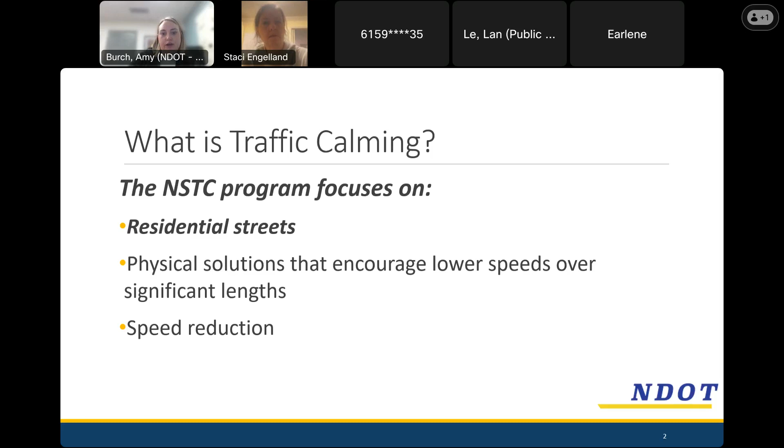We do this program on residential streets, and the whole idea is to install physical solutions that encourage slower vehicular speeds over the length of the street. We're really targeting speed reduction through this program. We often talk about the 3 E's of traffic calming, which is education, enforcement, and engineering.

Education is a lot of what we do, just educating the public on what traffic calming measures are, and the reason why we install those. We do that through these meetings, as well as other more public-facing information and educational programs. The enforcement is obviously what the police department does, but we know that the police department has a huge job, and they really can't be on all these residential streets every day and every hour.

So that's why this program focuses on engineering. How do we change the street or adapt the street to encourage those slow speeds and safer driver behaviors? That's what this program focuses on, is the engineering. And we do that because we know that there's a strong correlation between safety and speed.

This falls in line with the Vision Zero program that NDOT has, which all of Metro has adopted, where we're striving to achieve zero deaths on the road. Part of that is curtailing speeding, because speeding leads to more crashes, and more severe crashes.

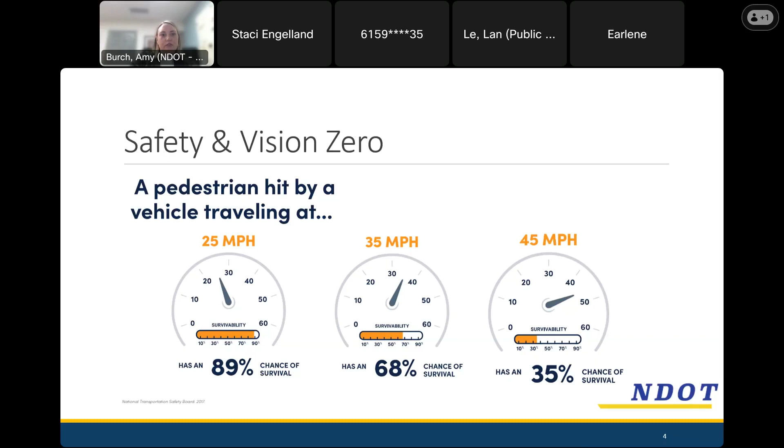As of last summer, there were 85 neighborhood streets selected. NDOT typically selects 50 per year, divided into two groupings of 25 and 25. But last summer, due to additional budget allocated by council, the neighborhood street traffic calming program was able to select an additional 60 on top of the 25 we'd typically select. That's why it was 85 in this most recent announcement.

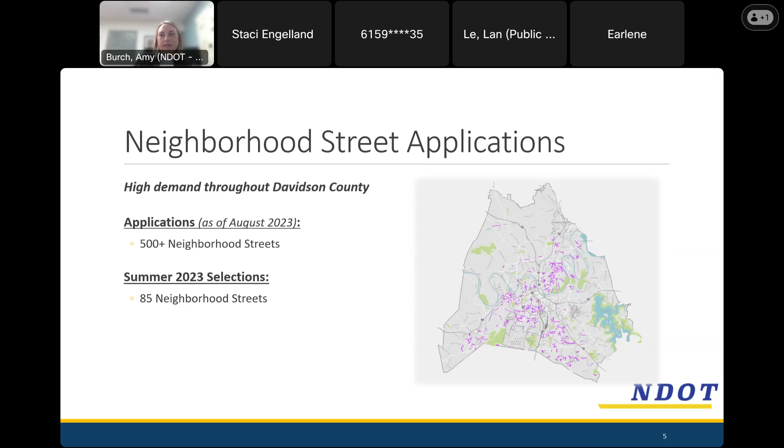Outside the traffic calming program, there's an excellent tool Metro has called Hub Nashville. If you're not familiar with it, essentially this is where you can report things and services that are needed, such as a street light that's out, a traffic signal not working, a sign that's been knocked down, a storm grate that's clogged and causing flooding in your yard, requests about trash—all those Metro services. This is a great place to report issues or ask for service.

You can do that by calling 311. Their hours are Monday through Friday, 8 to 5, I believe. There's also an online website, hub.nashville.gov, or an app you can download to your smartphone to make those requests. What's great about Hub is you get a service request number so you can follow up if needed. It's a great way to reach the correct department, because the system takes that information and gets it to the right department, the right person who can answer your question or solve your problem.

Back to traffic calming though. We have a prioritization process because we obviously have a lot of demand from streets and residents who've asked for traffic calming. So how do we select those? We score each street out of 100 points, divided into 5 main categories. We collect this data on every street that's requested traffic calming, measure them, and select those that score the highest.

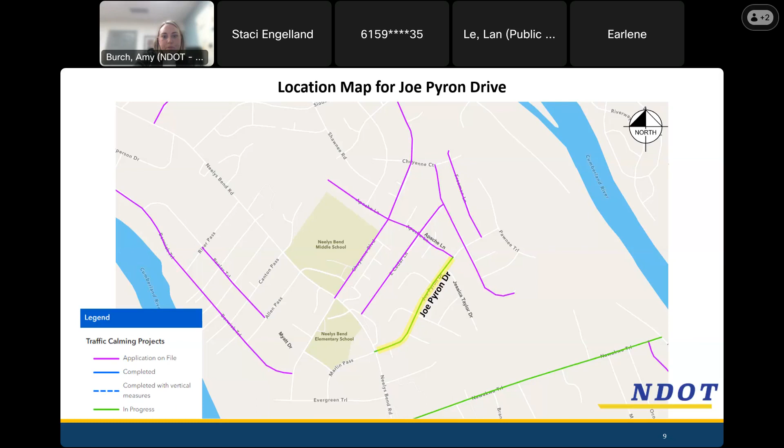So now we're going to talk about our toolbox. These are the measures that we use in the program to encourage slower speeds.

Our main tool that we use are called speed cushions. These are rubberized devices installed on the pavement in several different configurations, depending on the width of the street and other characteristics. They are vertical devices, you may think of them as speed humps, but the cushions are unique in that they have gaps between them to allow emergency response vehicles to not be as affected, while still being wide enough and effective for passenger vehicles to drive over and slow down as they approach and travel over them.

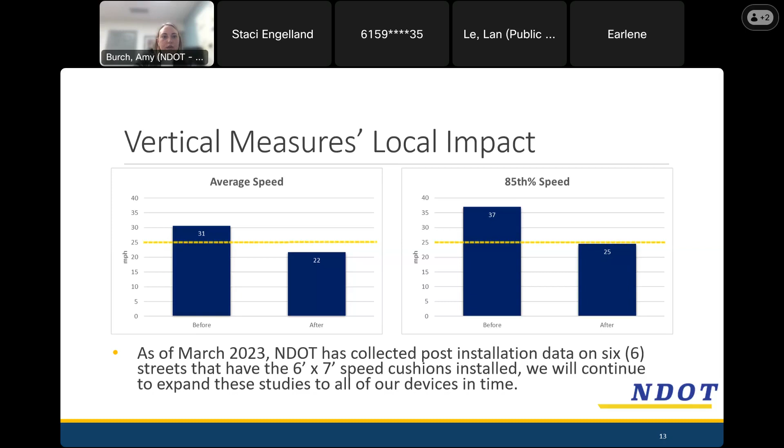I do want to go back, because I often get this question about speed cushions and speed tables: where do we place them? What about driveways?

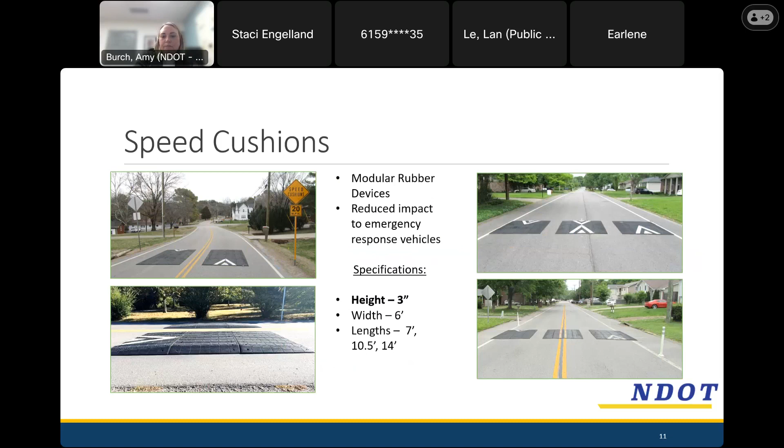When we place these, we don't put them right behind a driveway because that would be really cumbersome for someone turning in and out. So we try to place those a minimum of 15 feet away from driveways, so you're not having to back over them sideways or at an angle. We keep them away from driveways, streets, and intersections. We can't put them in the middle of an intersection either. Wanted to make that point.

Radar feedback signs are another tool in our toolbox. These are typically placed with a speed limit sign, and they measure with radar the speed of approaching vehicles, providing a reminder or alert to drivers when they're going above the posted speed limit. If a driver is going above the programmed speed limit, the sign will flash at them. We've seen good reduction and compliance using these tools.

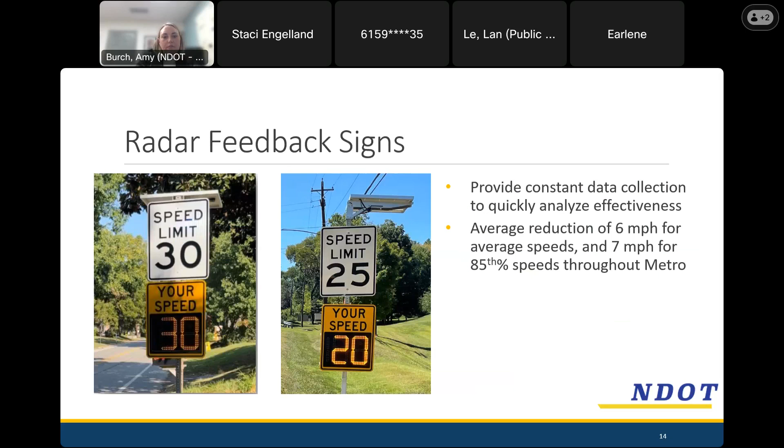The 85th percentile speed has been reduced as much as 7 miles per hour where these have been installed. We'll often use these in places where we can't install speed cushions due to grades, like hills and curves, where we can't put in vertical measures, or on streets where volume is too high for vertical measures. This is a tool we use to get slower speeds.

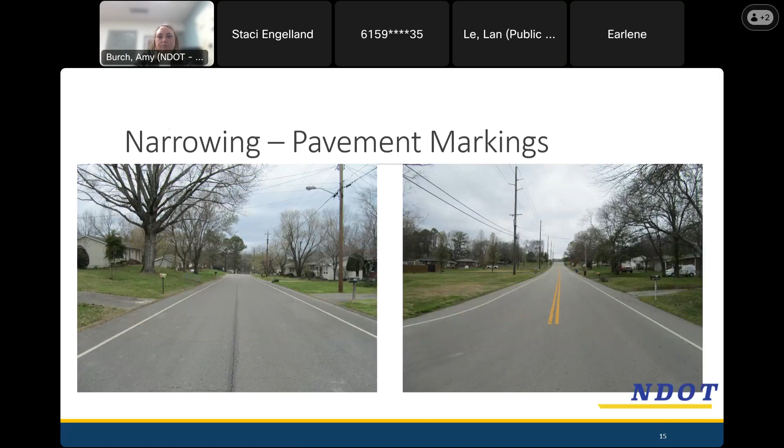We'll also incorporate narrowing and pavement markings. Sometimes we may have a street like the one on the right that had a center line but no white edge lines, so we can come in and put those white edge lines in to narrow the lanes and give that visual constraint for drivers.

We also use tools like bulb outs and chicanes. The picture on the left shows bulb outs, where we might stripe out the corners at an intersection when we have a wide street, to narrow the crossing distance for pedestrians. It may also designate where on-street parking goes, keeping parked cars from getting too close to a stop sign. Again, the striping narrows the lane widths, which gets drivers to slow down.

When we do these, we'll use paint for the bulb outs, along with white flexible delineator posts. The picture on the right shows chicanes, where striping and pavement markings have been used to add curvature to an otherwise straight street. Oftentimes that's done by alternating the parking from one side of the street to the other over the length of the street, so it adds an S shape to the street.

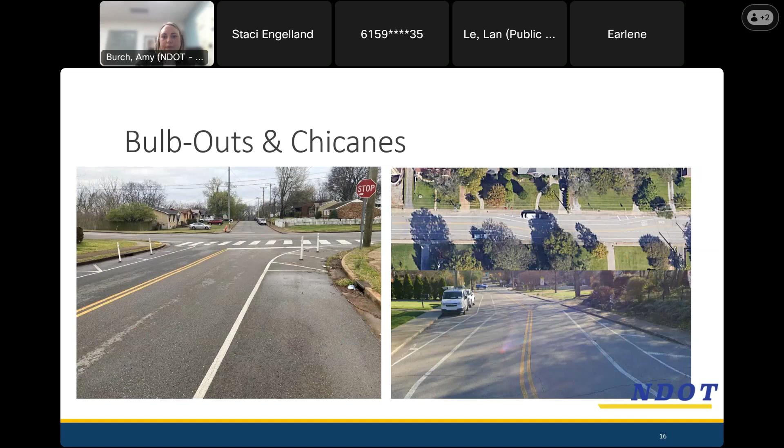That type of tool requires all the right conditions in order to work - a street with the right width to accommodate it, and not too many driveways and things like that. So that's some of the things we look at when coming up with a design.

Traffic circles are circular islands installed in the middle of usually a four-legged intersection, and they're treated similar to roundabouts where you drive around them in a counterclockwise fashion. This is a tool that's sometimes hard to find the right place for, because we need the intersection to be wide enough while still accommodating larger vehicles.

What it does is create horizontal deflection through the intersection. Drivers going through may not have to stop, but they need to slow down in order to navigate through it. Typically the side streets still have stop signs, and the main street will not have stop signs, but will need to slow down to drive around the circular island.

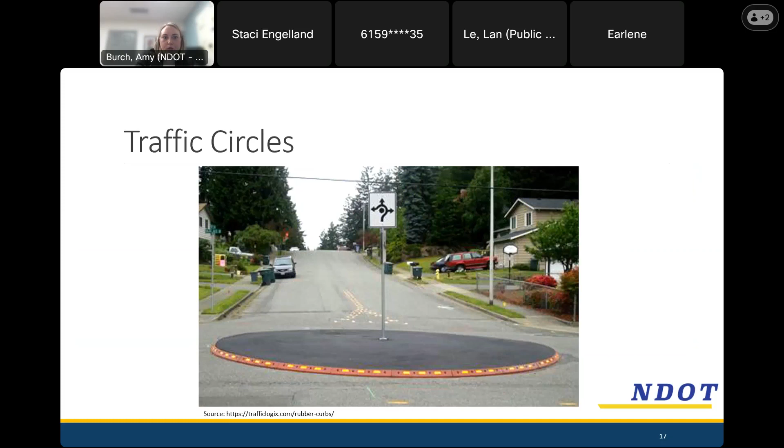So those are our measures that we typically use.

Now I'm showing our draft recommendation for Joe Pyron Drive. Based on the characteristics of the street, the width, the length, and how the street connects, we're recommending that speed cushions be installed. These are just symbols, a high level concept to give you an idea of the spacing. We're talking about 5 sets of speed cushions, and the picture in the inset is about what that configuration would look like. It would include warning signage at each cushion location, with 3 sets across and white markings on them as well.

So I might pause there and see if there are questions about this plan. Our next slides are some updates on how the program runs, our timeline and next steps. But I'll pause here first and see if anyone has questions - you can put them in the chat box or unmute and ask. What we're trying to do is get feedback about this plan to make sure we're on the right track, and that this is something the people who live on Joe Pyron are interested in incorporating.

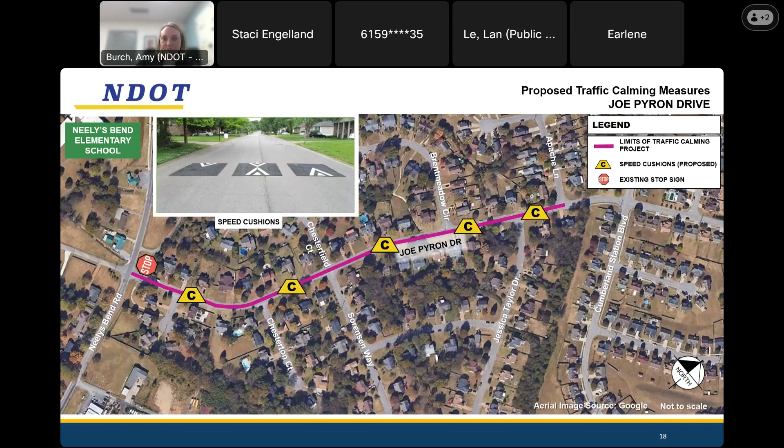All right, so no other questions. I'll move on so I can get you back to the rest of your evening.

So this is a flow chart of our whole program. As we discussed earlier, it starts with an application - residents actually apply to have their street considered for traffic calming. We have 2 cycles per year where the application window is open; the next one is the first 2 weeks of March this year. The application is form-based, online through NDOT's traffic calming website - you can enter that and apply during the open window.

Then we take our list of all the streets that have applied for traffic calming and collect the data where we don't have it. Once a street applies but doesn't get selected, it stays in our process and may get selected the next round, so we often have some of the data already for those streets. We collect the traffic data, sidewalk information, and all of that, run it through our process, and select the next round for traffic calming. That's usually based on the budget allocated to the program each year - typically 25 streets per round, so 50 streets per year.

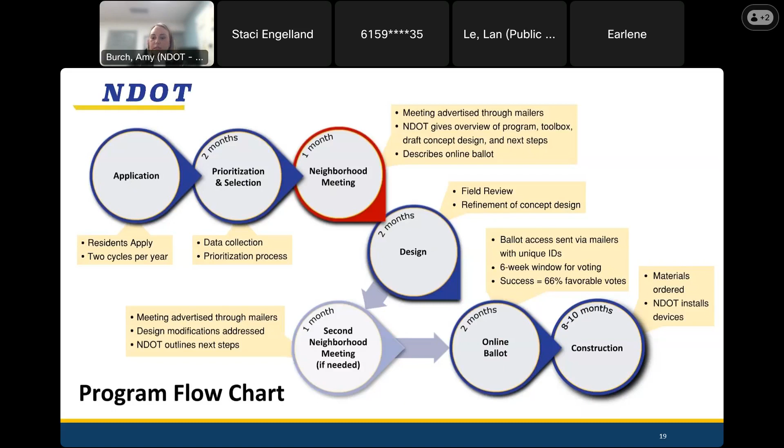When you receive that postcard, you can vote yes or no for the project, and from the links on the postcard you can view the plans. We post the more detailed traffic calming project plans on NDOT's website, so anyone who receives the postcard but isn't familiar with the project can review the plans and then vote yes or no.

If 66% of the respondents vote yes, the project moves forward. I want to be clear — it's not 66% of all the people or properties on the street, it's 66% of the respondents.

It's an online form that you vote through — the link takes you to an online form. Also on the postcard is a phone number to NDOT, so if someone receives their postcard and isn't able to vote online for whatever reason, they can get help from someone at NDOT to guide them through the process.

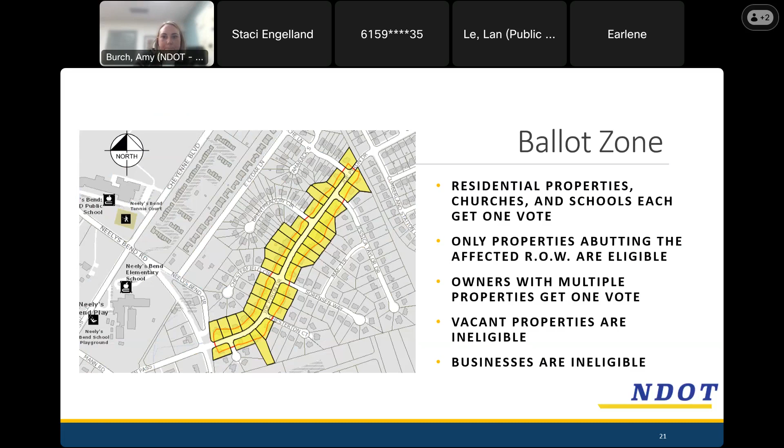The votes for the ballot results are posted there too. Once we tally the votes, we post the results—not individual votes, but just the summary, like 72% in favor, so it passed. The ballot is open for 6 weeks, and the closing date for each street is on that postcard, so you'll know when to start checking for results. All of our design plans for every street are posted on this website as well, along with our online tracker map. When we have the application open, that's also accessed from this website. So a lot of information about the traffic calming program is posted there.